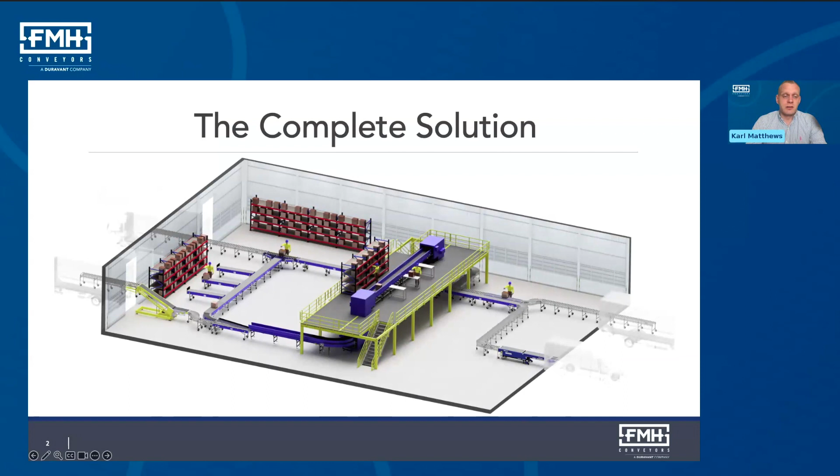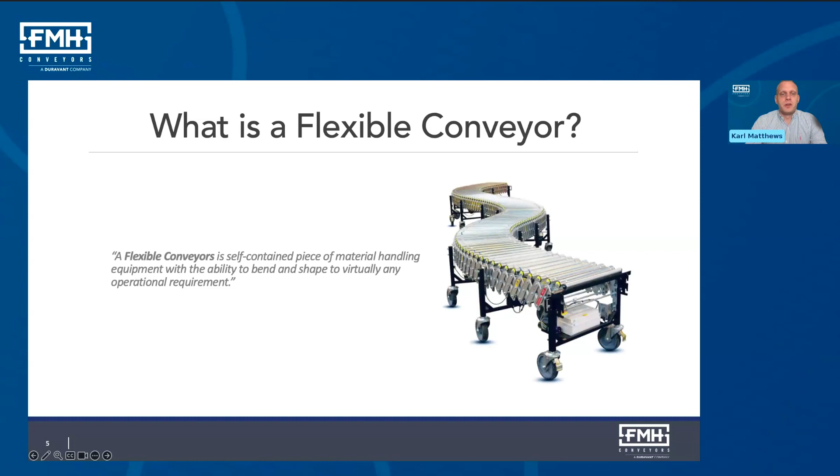What is a flexible conveyor? A flexible conveyor is a self-contained piece of material handling equipment with the ability to bend and shape to virtually any operational requirements. Some of the variants: we have gravity flexibles and powered flexibles.

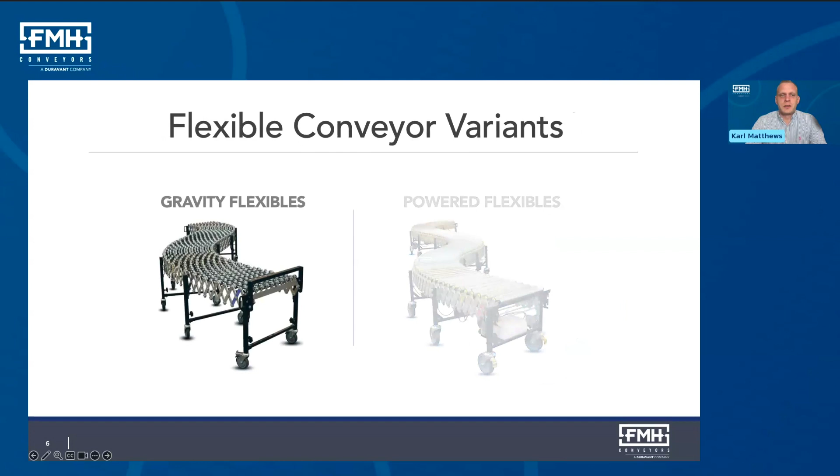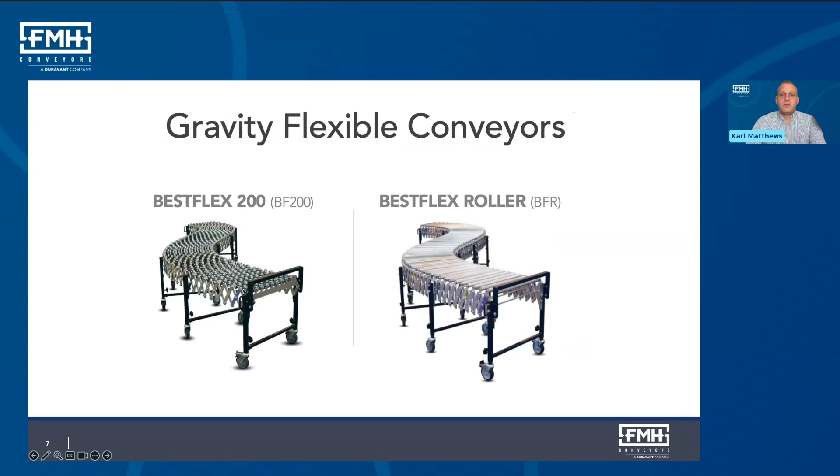We're going to jump into having a look at some of our gravity flexibles: our BestFlex 200 and our BFR, so skate wheel and roller. We'll start with the BF 200.

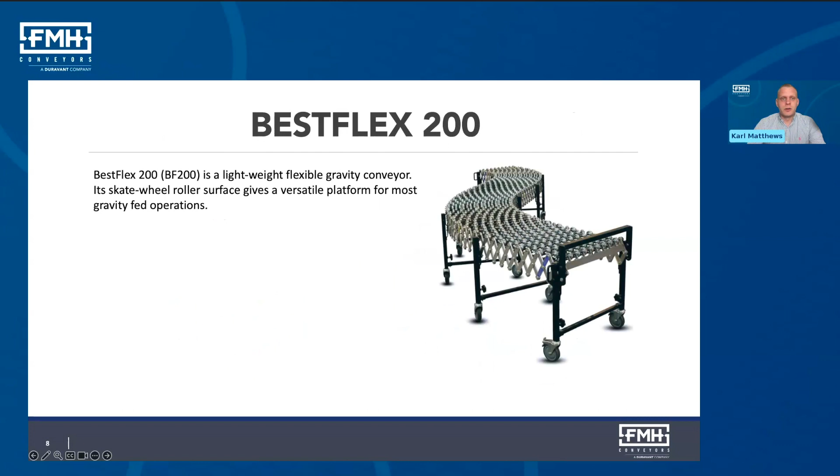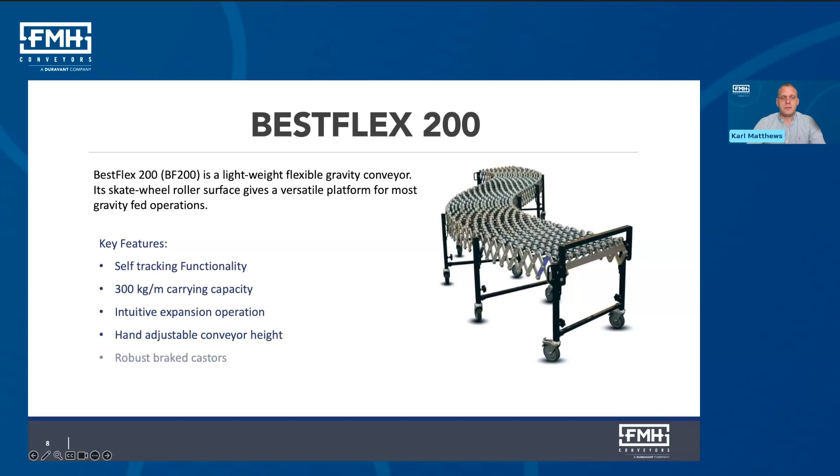The BF 200 is a lightweight, flexible gravity conveyor. Its skate wheel roller surface gives a versatile platform for most gravity-fed operations. Some of the key features include self-tracking functionality, 300 kilograms per meter load capacity, intuitive expansion operation, hand adjustable conveyor height, robust brake casters, and an array of width options.

Some of the key specifications of a BF 200: expanded length anywhere from 2.5 to 20 meters in a single length, but by utilizing the physical connector, the roller stop connector, you can go for as long as you need to. You can add 2, 3, 4 units together. All of our flexible conveyors are available in the same width ranges: 450, 600, 750, and 900.

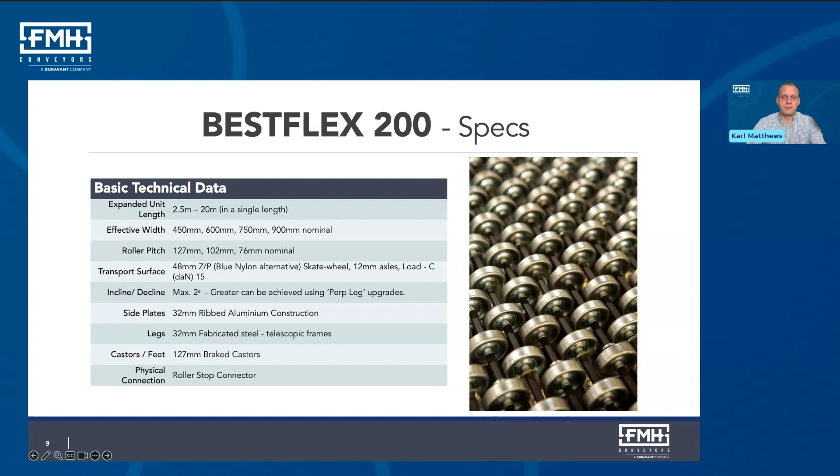With the BF 200, there are 3 different types of skate wheel you can choose: a blue skate wheel, black plastic skate wheel, or a steel skate wheel. Really depends on the product you're moving, the length you're looking to go over, the decline, the speed you want your product to run at. Plenty of different options to discuss with our expert sales team.

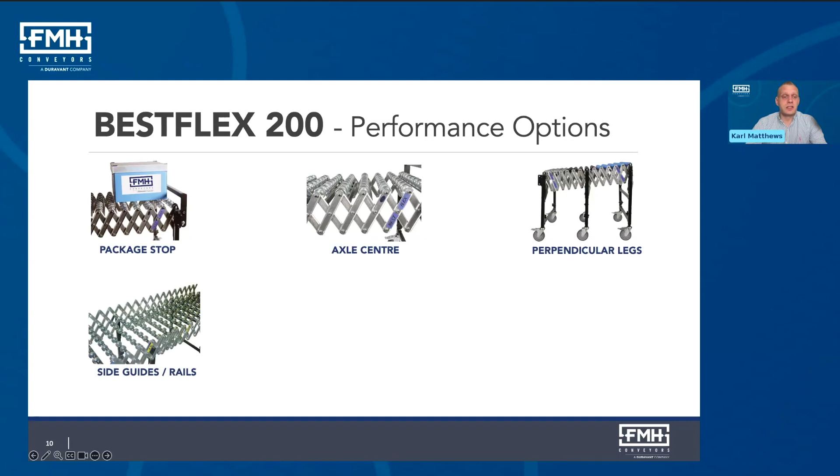Some of the performance options on BF 200: package stops, reduced axle centers to allow you to move smaller product, perpendicular legs which keep the legs vertical in both the expanded and compacted positions for easier mobility and added stability, side guide rails to prevent product from leaving the side of the conveyor around tight turns, heavy duty casters, and the skate wheel variants as touched on.

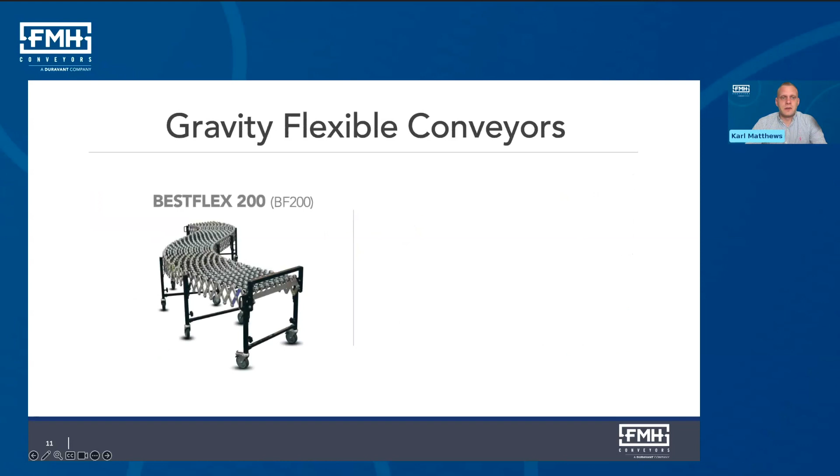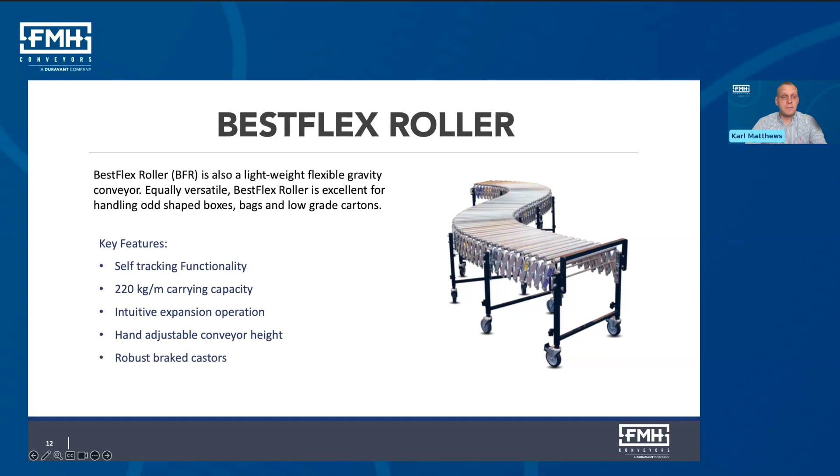That's our BF 200. Let's jump into our BFR. They're a very similar design, just with rollers rather than skate wheel. The BFR allows us to handle odd-shaped boxes, bags, low-grade cartons. Once again self-tracking, slightly lower load capacity at 220 kilos per meter. Hand-adjustable height, robust brake casters, and once again that array of width options.

Some of the key specs on our BFR: same lengths as the BF 200, so anywhere from 2.5 to 20 meters in a single length, same width range, same roller pitch range. They use 40 millimeter steel tube rollers, and once again you can connect as many units together with our roller stop connector as you need to.

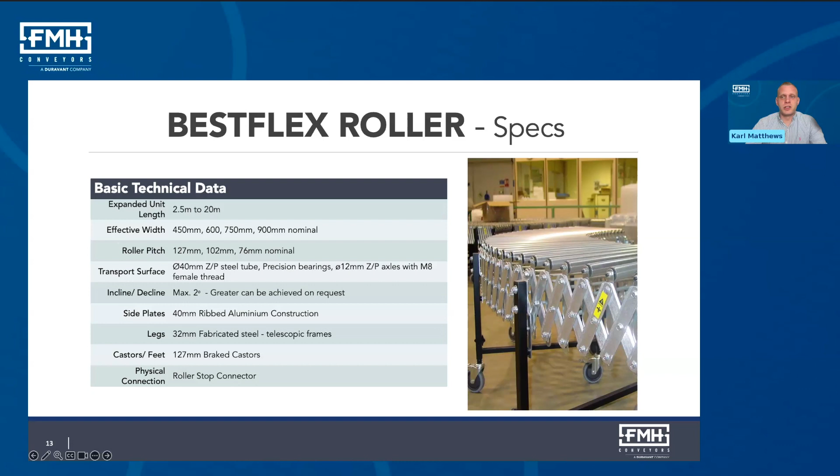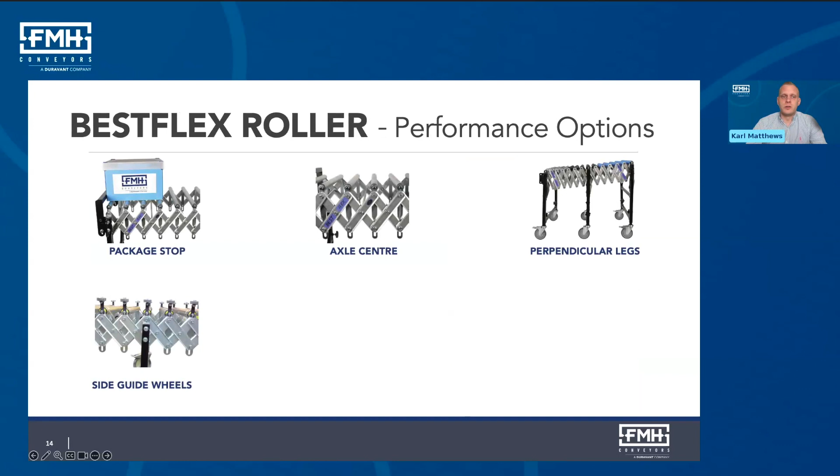Jumping into the performance options on our BFR: package stop, reduced axle centers, perpendicular legs, all the same as the BF 200. We have side guide wheels on our BFR, so it allows the boxes to move along smoother. Heavy duty casters, and once again the roller stop connector for connecting 2 modules together.

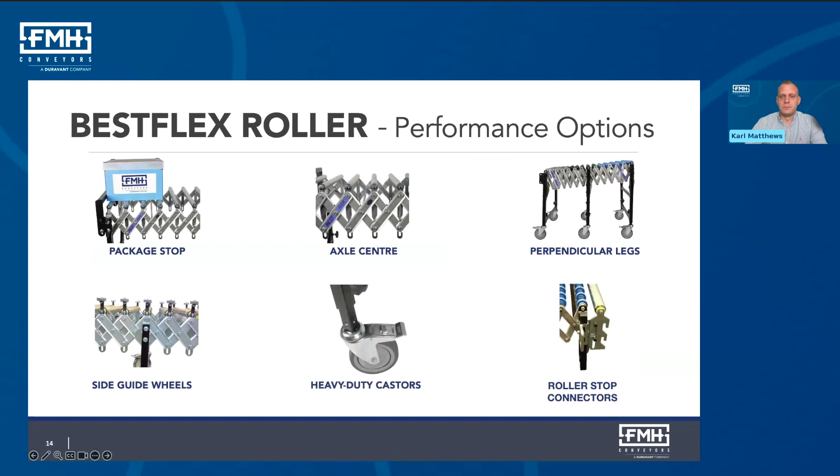Let's have a look at some of the applications for our BFR and Best Flex 200. Some of the primary applications where you would typically see these products: within distribution centres, third-party logistics, e-commerce, retail stores, parcel post, and manufacturing and packaging - just some of the main areas where these products see the most benefit. Secondary would be the wine and spirits industry, and slightly more uncommon to see these products within tyre handling or within airports.

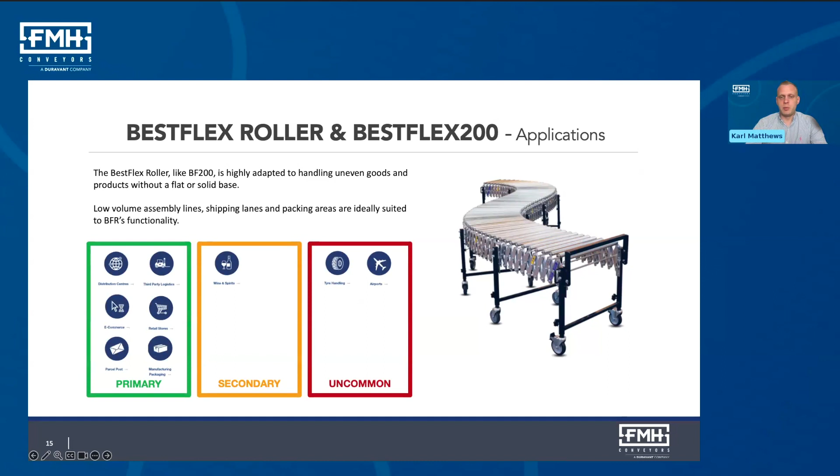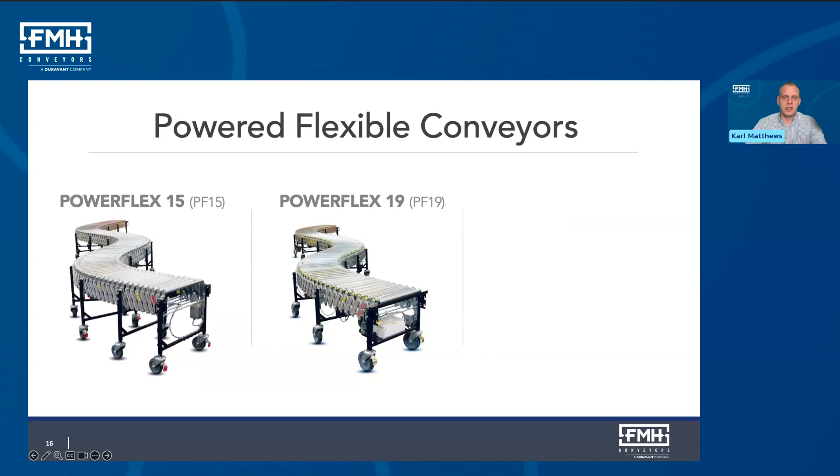Then we move on to the powered side of our range. So the powered flexible conveyors, we have our PF15, our PF19, and our PowerFlex SmartFlow. We'll spend a bit of time just running through the key details on each of these individual products. Start with the PF15.

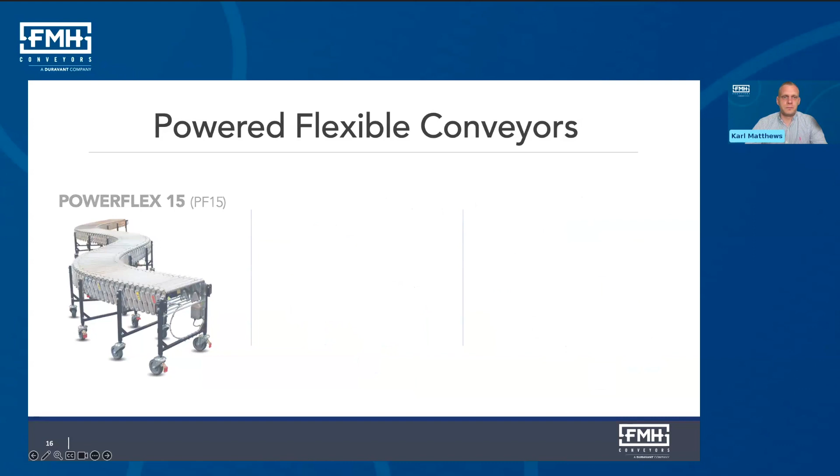The PF15 provides maximum productivity in shipping, transportation, and packaging applications where usability and adaptability are most needed.

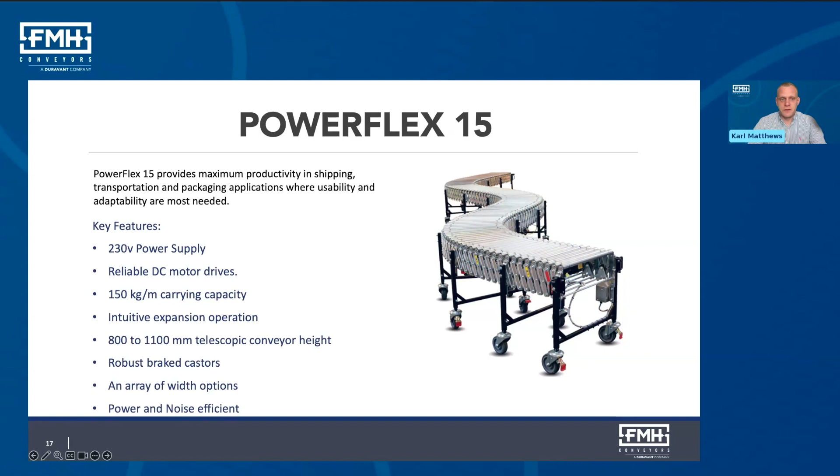Some key features: the PF15 runs off a 230-volt power supply using reliable DC motor drives, has a carrying capacity of 150 kilos per linear meter when level. It has intuitive expansion operation, the same as all of our flexible conveyors. A standard height of 800 to 1100 millimeters, but this can be adjusted depending on what your application needs. And robust brake casters every other leg. We have the same width options on our PF range as on our gravity range, so 450, 600, 750 and 900 millimeters. And the PFs are power and noise efficient.

So what are the specifications? Some of the basic technical data: expanded unit length of 0.6 up to 20 meters long in a single length. This is dependent on the roller pitch. The lengths shown are dependent on a 127 roller pitch. If you reduce to a 102 or 76 mil, for the ability to handle smaller packages, it does reduce what the overall length of one conveyor could be.

This is because we can only run a maximum of 16 DC motors off a single 230 volt power supply. However, what you can do is either go up to a larger power supply, or we can combine multiple units together. They're fabricated from 40mm ribbed aluminium construction side plates, 150mm brake casters on the PowerFlex every other leg, multiple DC drives, 90 watt, 20 to 120 volt DC, and they run using 5mm polycords with an 85 Shore hardness. Standard running speed is 5 to 36 meters per minute, controlled by an onboard speed controller, which also gives you directional controls. So all of our PowerFlex conveyors are bidirectional as standard, running off a 230-volt single-phase 50 Hz power supply.

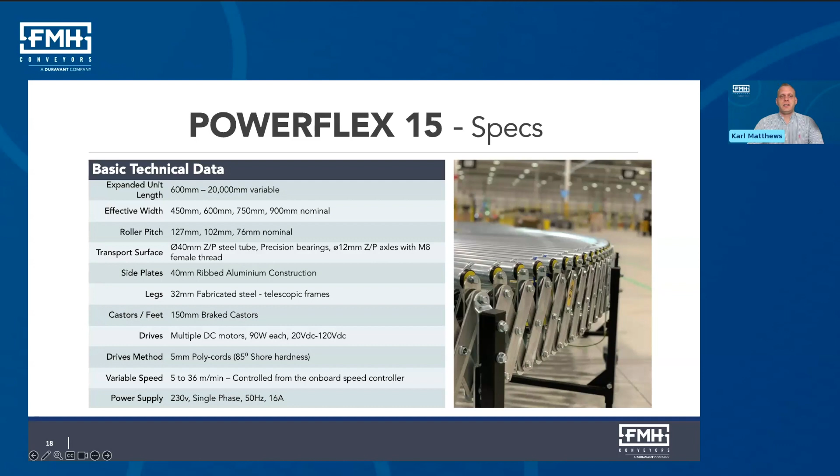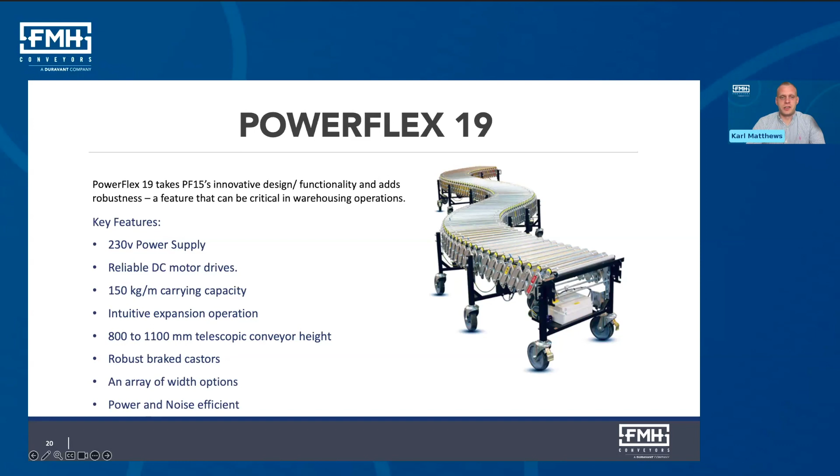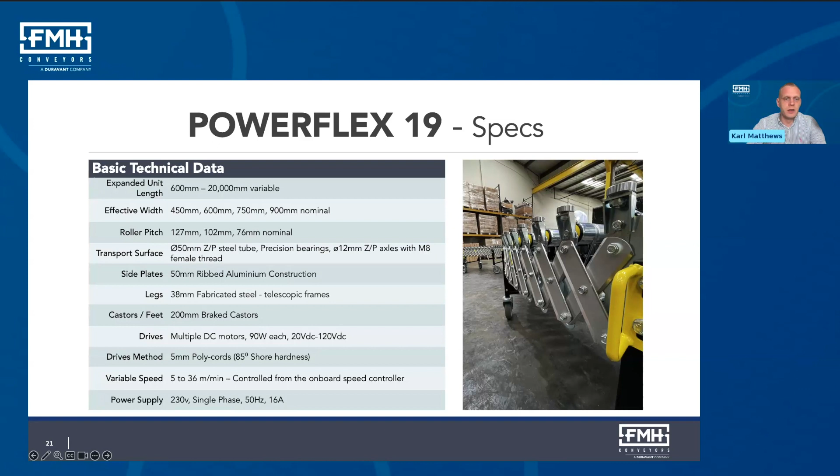Have a look at some of the specs. The same length from 0.6 up to 20 meters long, depending on the roller pitch. Same widths, using a 50mm roller on the PF19 rather than a 40mm on the PF15. Slightly bigger side plates, leg fabrications and casters all give that added level of robustness that some applications may require. We're still using those multiple DC drives, one every 10 rollers, and still the same 5mm polycords. Once again, variable speed, 5 to 36 meters per minute, controlled by the onboard speed controller, which gives you that bidirectional functionality as well. You can utilize these in both a loading, unloading, or A to B scenario within your workspace. Running off a 230-volt single-phase 16 amps.

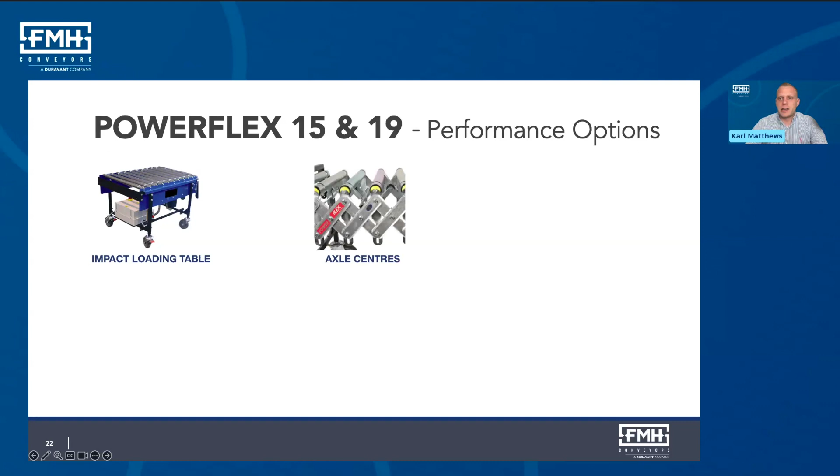So let's have a look at some of the performance options for the PowerFlex range. We have the impact loading table: fabricated steel side frame, braced throughout to create an impact loading section, designed to handle the increased abuse and wear normally associated with the loading point of a conveyor. We all know that in our warehouses you have boxes coming down quite heavily on the front end of a conveyor. This is designed to absorb that impact, prolonging the lifespan of your product. Axle centres, so reduced axle centres, as touched on before, 127, 102, and 76, depending on the size of package you're looking to handle.

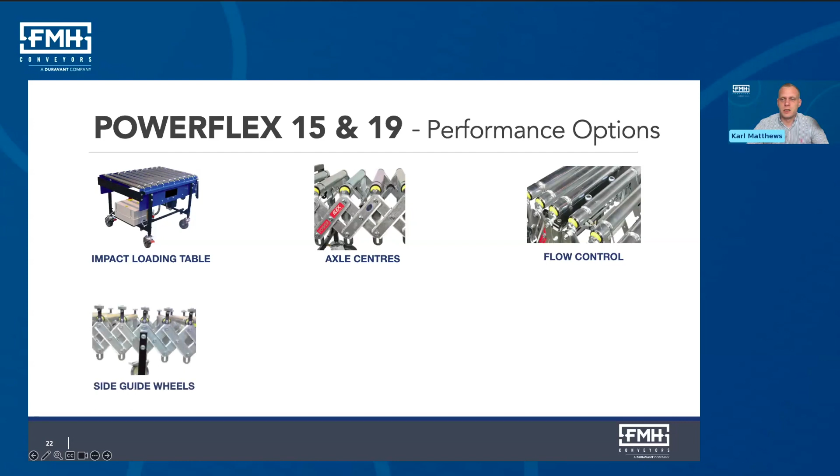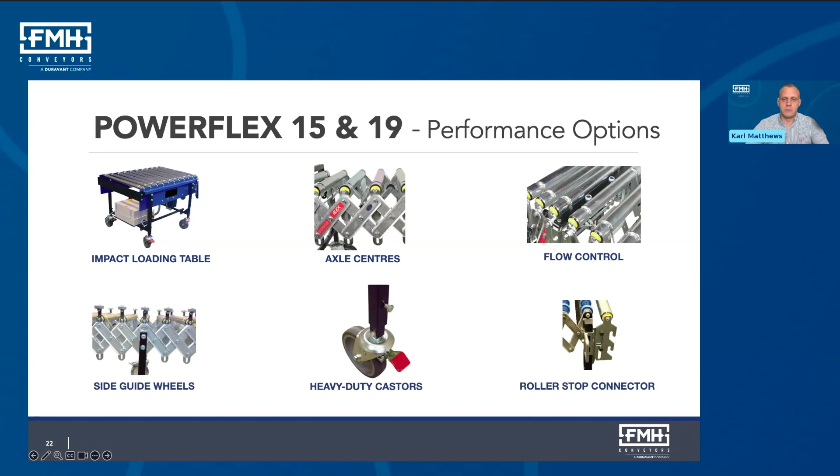We can incorporate flow control into our PowerFlex conveyors, looking at the photo cells to provide an automated solution, giving the user improved ergonomics, reduced labour costs, and an improved service life on the conveyor. Side guide wheels prevent cartons from running off the edges of the conveyor. Heavy duty casters and a roller stop connector allow you to easily connect PowerFlex conveyors with gravity conveyors, PowerFlex conveyors with each other, or with other products from the FMH portfolio or other manufacturers' equipment.

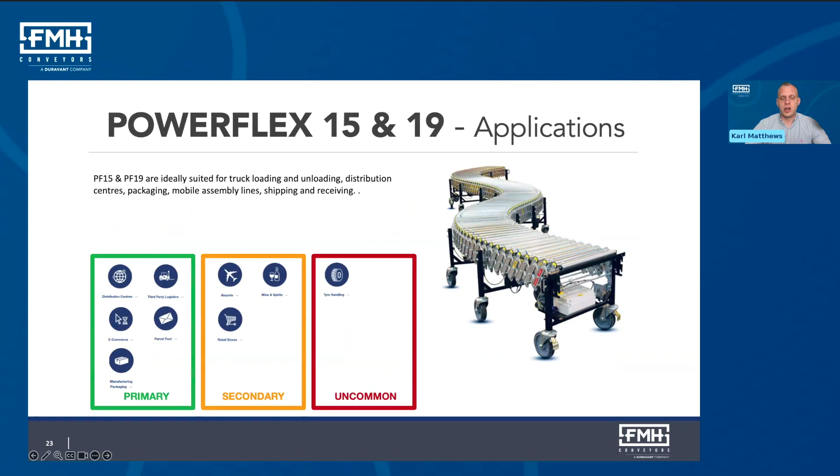Have a look at some of the applications within our PowerFlex range. Typically they're suited for truck loading, unloading, use in distribution centres, packaging, mobile assembly lines, shipping and receiving. That leaves them with primary objectives of being used in distribution centres, third-party logistics, e-commerce, parcel post, manufacturing and packaging. Secondary usage would be airport, wines and spirits, and retail stores. And once again, for flexible conveyors, quite uncommon but not unheard of in the tyre handling industry.

So just jumping into what is flow control.

Flow control gives a conveyor intelligence. Using optical electrical sensors, the conveyor can transport delicate shipments around warehouses in the knowledge they will be kept in a separated, organised and efficient flow.

We'll touch on it very briefly at the end of the presentation, but you may have seen the webinar a few weeks ago from Martin Kingston, which goes into much more detail around what flow control is and what flow control options we have available.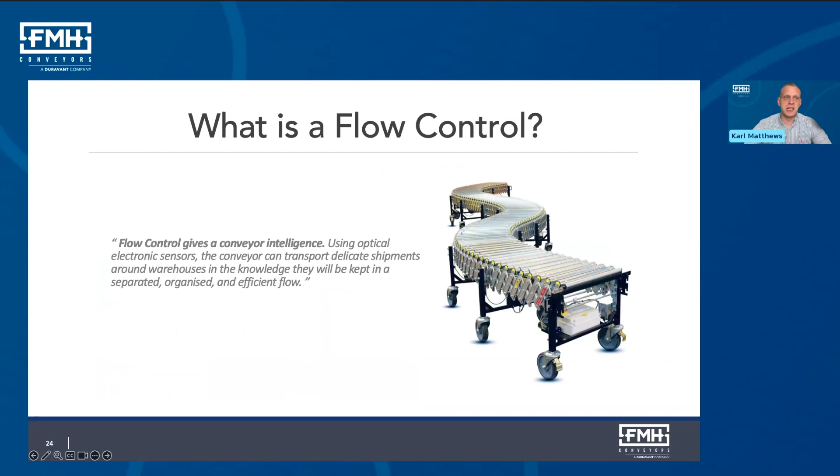Just in case you haven't seen it, here's a high-level overview of the types of flow control we can offer. We have zero line pressure with a singulation release, zero line pressure with a train release, build back, die back, package stop, and smart flow and indexing.

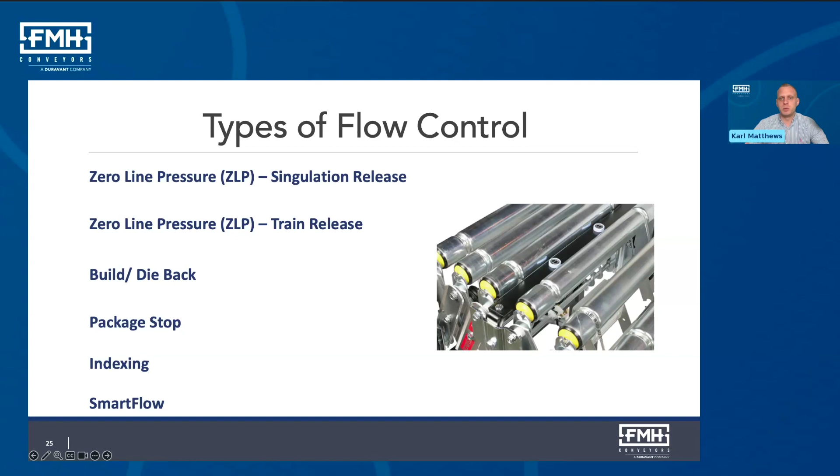Smart flow is a combination of all of the above on a single conveyor, which allows it to have multiple uses and multiple applications. You can easily select through either a toggle switch or a push button control which function you wish the conveyor to operate at, allowing multiple uses of the conveyor within the warehouse environment.

Let's have a look at some of the USPs behind our flexible conveyors. We've got a full lightweight design and construction using extruded aluminium frames. This gives us that lightweight feel and the ability to move them around the warehouse very easily, meaning using them across multiple dock doors or multiple areas within the warehouse within a shift is perfectly feasible with our design.

The DC motors are low voltage, very safe, and very easy to maintain. That's a huge benefit for anybody using these conveyors.

We are the original designers. In 1994, Best Conveyors originally began manufacturing gravity conveyors over in the UK, and then we grew that range and brought the PowerFlex in as well. So we were the original designers of the flexible conveyor.

All of our conveyors are bespoke for your application. Our sales team remain available to come out, have a look at your site, have a look at the operation, and help you build a conveyor which will ultimately serve its purpose best within your business.

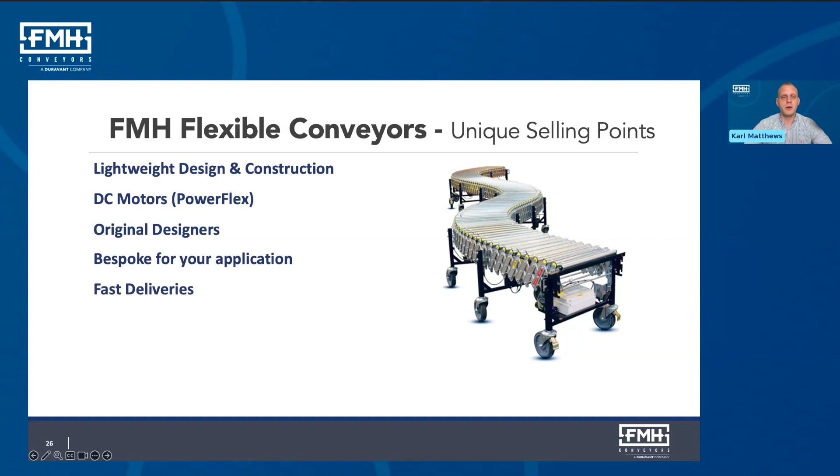Fast deliveries - typically our delivery time starts around 3 weeks for the gravity conveyors, and depending on the complexity of the project could go up to sort of 6 to 8 weeks. But have a chat with the sales representatives, they'll be able to give you a really good idea of the lead time on the conveyors you're looking at.

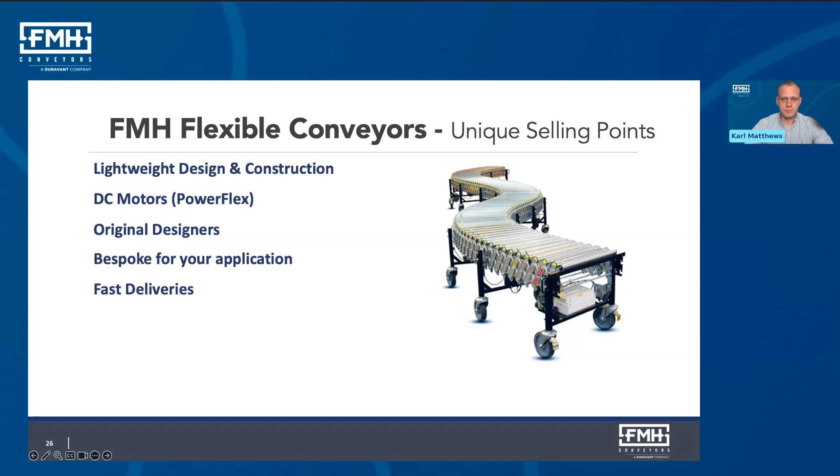And that's really an overview of our flexible conveyors. So it's time now to jump into a couple of questions that have come in.

Question number 1: What makes your flexible conveyor solutions stand out from the competition? I think the easy answer is what was on the final slide we just looked at - the lightweight design using extruded aluminium gives it multiple purposes around the warehouse, making it very easy for your associates and operators to move the conveyor around. The other key thing is being the original designers of the flexible conveyor gives us that experience, knowledge, and know-how of knowing what our customers expect from our product and from a flexible conveyor, and us having the expertise to tell you exactly which conveyor is best for your operation.

Can you customize the conveyor width and length? Yes, standard widths, as we touched on, are 450, 600, 750 and 900 wide. The lengths range from sort of 0.6 up to 20 meters in a single length, but you can combine as many as you like. So realistically, the conveyor can be as long or as short as you need it to be.

How easy is it to integrate your conveyors into an existing production line? It's fairly straightforward. We offer anchor frames, which fit at the end of your current production line, giving you a fixed point to connect the flexible conveyor to. Working with our controls team in-house, we can integrate your existing conveyor system with our flexible conveyors - for example, linking the emergency stops or linking the start stops ready to receive signals. So really, it's however you want to integrate - we can use the functionality of the PowerFlex to make that happen.